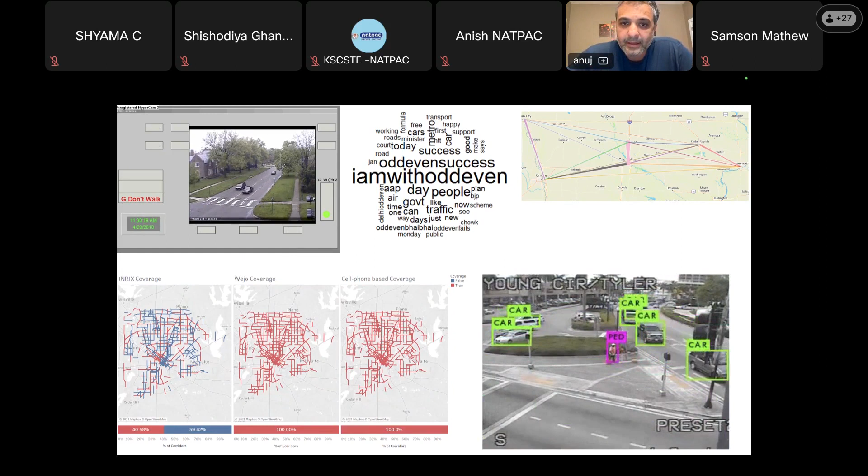The big reason for giving this talk is that as we are moving through times, the amount of data which is becoming available is increasing significantly. We have access to video data coming in. We have access to data in terms of Twitter feeds and cloud-based data available. We also have data coming from telematics of various vehicles driving on our roads. Previously, when we were operating traffic signals, the data usually came from one source, which was probably inductive loop detectors on the roadway. So with all this new data coming into place, there are three basic reasons why this jump in data availability is happening.

One is that the cost of compute is going down significantly. To give you an idea, if you would have bought something which had the power of an iPad in the 1940s or 1950s, it would have cost you millions of dollars. But today you can get it for the price of maybe a few hundred dollars.

The other big thing is that even the cost of sending this data over wire or wirelessly has gone down significantly. As you would know, the cost of communication has dropped. In 1999, if you had to send around 1000 Mbps, you would be paying around $1,200. But today you can almost get it for $10-15.

Which means that people are not only able to process the data on the edge by cheap compute, they're also able to transmit a lot of this data. And what it has enabled is the ability for cars to start communicating and becoming the sensors themselves, because now a lot of these cars are sending back information to their OEMs, which are packaging and selling this information.

The final thing is, once these devices are sending the data back to us, the cost of storing this data has also significantly reduced. If you went out in the market to buy a terabyte hard drive even 10 years back, it was pretty cost prohibitive, but now they are coming for $100. So not only can you process the data on the edge to collect a lot more data, you can transmit it for a very cheap price, but you can also save multiple years of data without spending a fortune.

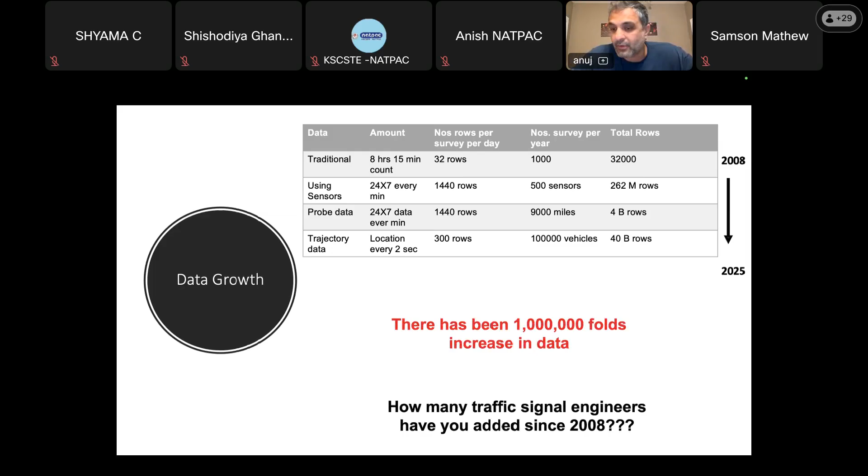So one of the common processes, and this is not just in the US - I have had presentations in multiple countries like Australia, Europe, and even India - they're facing the same problem, that although the data is increasing by a significant amount, the workforce to evaluate the data is limited, and also there is a limited budget, so you cannot just go ahead and put an adaptive system across your corridor.

There has recently been a flurry of tools developed just to provide a dashboard for this performance measure, and it is very easy to dump a lot of performance measures on a dashboard and give it to a department or TMC to look at. But again, we fall back to the same pain point, that the number of people available to evaluate this data is limited, and might not have the expertise or ability to process all the graphs being generated.

So this just gives a comparison of what the state of the art is today and what we are planning to move the industry towards with Signal IQ.

According to some stats in the US, they were claiming that there should be at least one engineer per 100 signals to have it operated at a very optimal and good quality. But usually there is one engineer per 250 to 500 signals. And there is a limited budget to have adaptive systems, so at least in the US, we are not going towards 100% adaptive throughout the city.

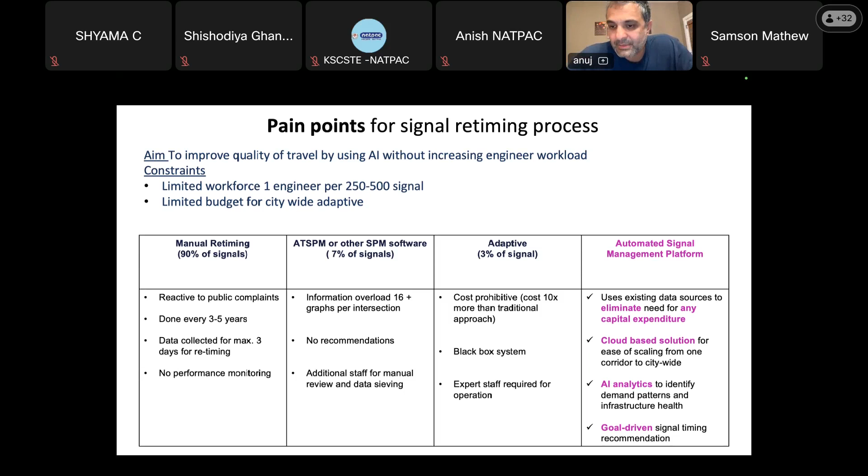We are using AI to analyze the data and coming up with goal-based performance metrics and performance signal timing refinement.

I essentially put this problem in stages where probably we are operating at level 0, where we have some information about the system, but most of the signal timing is done using personnel time, and that is level 0.

As we move towards more dashboarding, what I show is that although the signal performance improves, it requires more personnel to analyze the data from different traffic signals to come up with a good signal timing plan, so you require even more people.

Level 2 is more where we set some static thresholds, so that if a signal is performing worse than a specific threshold—for example, if the level of service falls below D—just pick up that specific signal and let us know and we'll fix it. That is more threshold-based planning.

Here also the personnel time goes down, but not significantly. And finally, we move towards the ML and AI domain for actually reducing this personnel time significantly. And finally, in level 5, we can do a full implementation.

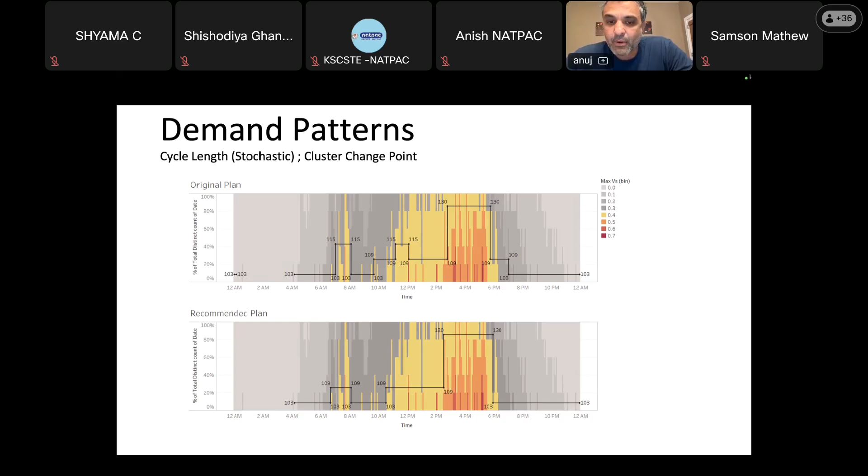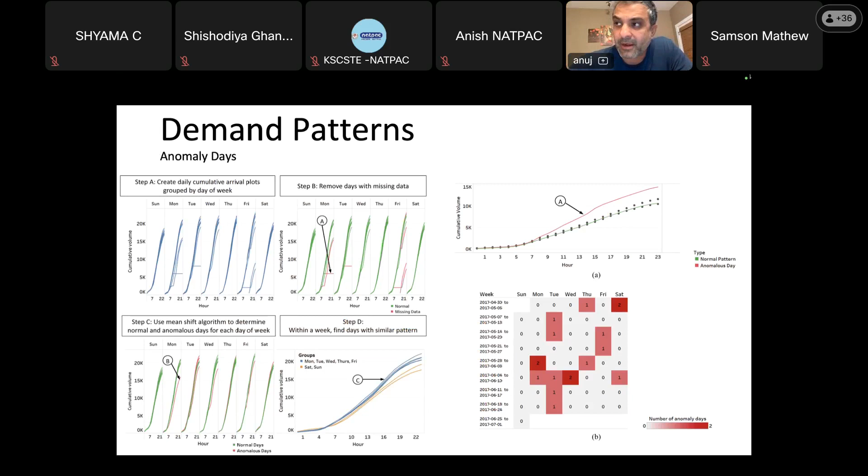So this is the first step after we have removed the event days. And one other thing which we do is look at the event days, how many event days happen for that street, to also assess whether a fully adaptive control would be a better option, or you can have time of day control on that specific site.

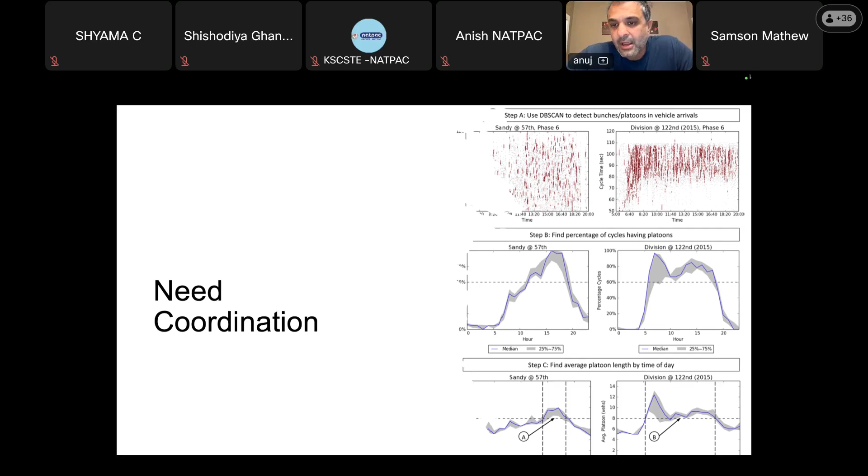Finally, we use something called percentage of cycles in platoon to identify what period of time the coordination is needed. In this scenario, what we are doing is essentially looking at vehicles which are near each other to call them platoons, and then identifying what is the platoon length, how many vehicles are present in the platoon, and then how many cycles during the day have that length of platoon available. So essentially average platoon per time of day and the percentage of the cycle that is having some platoon gives you an idea where the coordination would be important. Otherwise you can run the system free and just minimize delay.

Then after we have found out the cycle length which is relevant, and even the time of day patterns which are relevant, we try to optimize offsets. We used a genetic algorithm to optimize the offset. And this is where we were talking about the optimization function. This specific traffic which we are talking about is not heterogeneous. When I say not heterogeneous, it does involve cars and trucks, but it doesn't involve cyclists and motorbikes that much. This is still in Iowa.

So this is something where we have modified the time space diagram, which is commonly used for signal timing, and we have made it more horizontal by subtracting the time between two intersections. So if you see a green lined up on top of each other, it essentially means that the coordination is going well. Our optimization function is trying to do multiple things in this scenario. It is trying to maximize the green band, but it is also trying to not allow stoppages happening next to each other, a significant number of vehicles stopping. Like if I leave an intersection, I don't want that vehicle to stop at the next intersection.

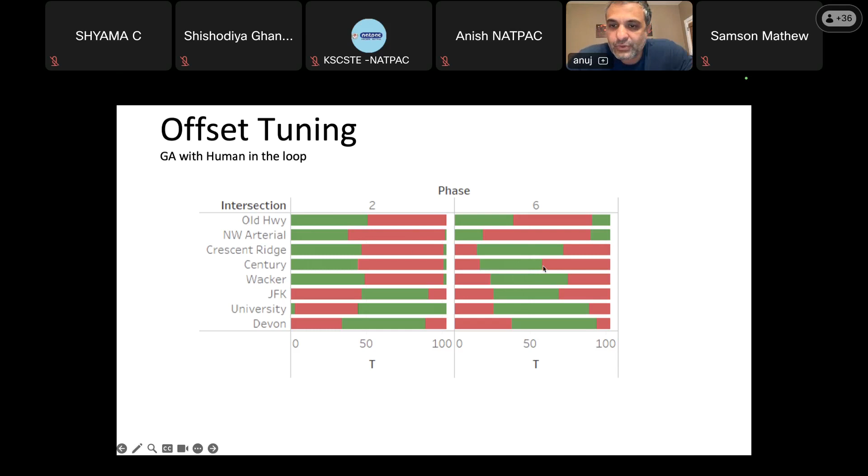So there is not much we can do to control the amount of green time because of the side street demands, but whenever possible we are letting people go through as much as possible, and then allowing the other street to go through. In this case the bandwidth is between the top and the bottom one, but in general that is the idea behind it. So at the end of the day, we produce something similar to this, where we are showing the demand patterns, and then the current timing plan versus the proposed timing plan.

And the color code which you are seeing in the green, in the red, kind of depends on this: it is adaptive. It is adaptive in the sense that the side street only comes on when there is a demand on the side street. So if you are seeing a light coloration in red, that means the number of times we saw that red come up is a little bit lower.

So essentially, instead of having a system which is a black box, every step which you go through and implement can be explained, why a specific value is being used, and this becomes easier for a traffic engineer to understand and implement. So we went ahead and implemented this system in several cities.

Before the fine tuning of the time plan, we wanted to find out which places we should be doing it. We came up with just 4 critical performance measures. Instead of producing 30 or 40 performance measures, we just focused on 4 basic ones. One is split failures, which essentially tells you if the queue is not cleared within 1 green time, that is a split failure. So what percentage of cycles are having split failure is an important measure.

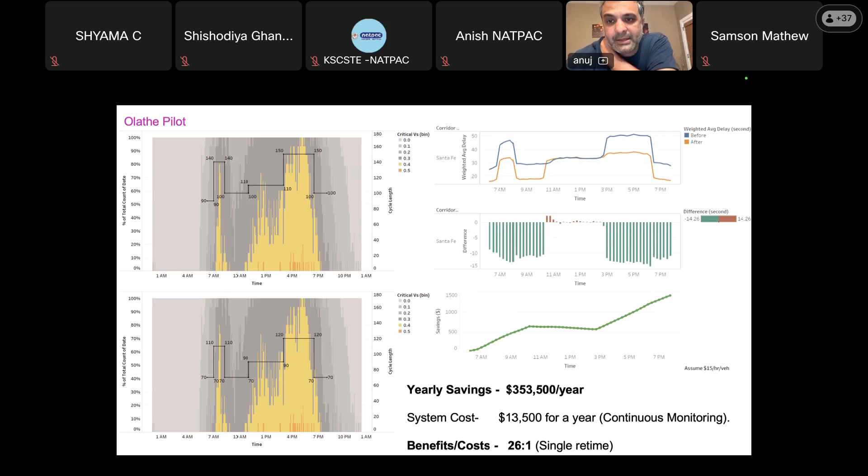And finally, the total savings on this corridor was around 26:1, even when we accounted for the cost of operating this system using cloud computing and getting the data from intersections. So this was pretty significant.

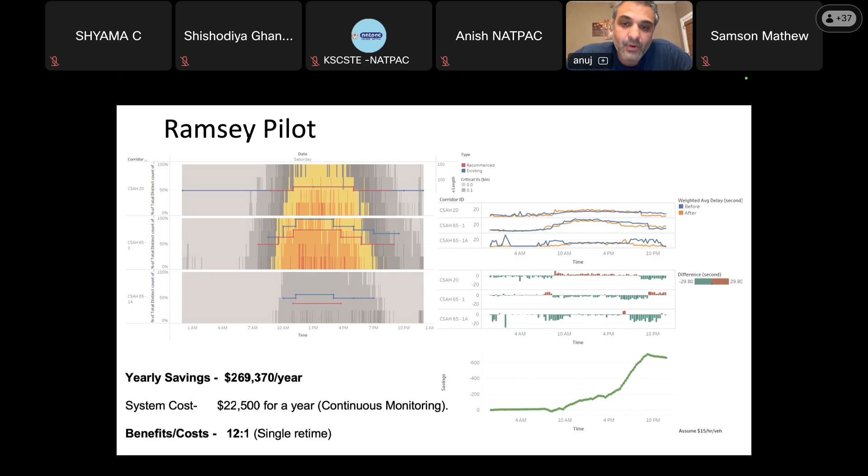Same thing when we implemented in the Ramsey corridor. When you are reducing the amount of cycle which you are providing, there can be negative impacts on your main street delays. And again, that brings you back to the objective function. What is your biggest objective? If your biggest objective is to do best on your main street and not worry about the side street too much, you have to change the weight functions of your GA to do that.

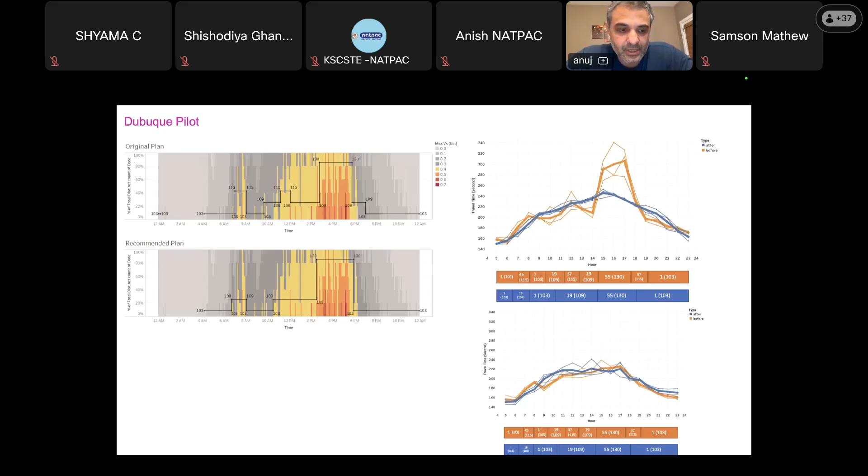So these are some examples where we have implemented the system. In this case, we were able to not only significantly reduce the delays, but also improve the performance on the main street. And this was done using, again, the offset optimization.

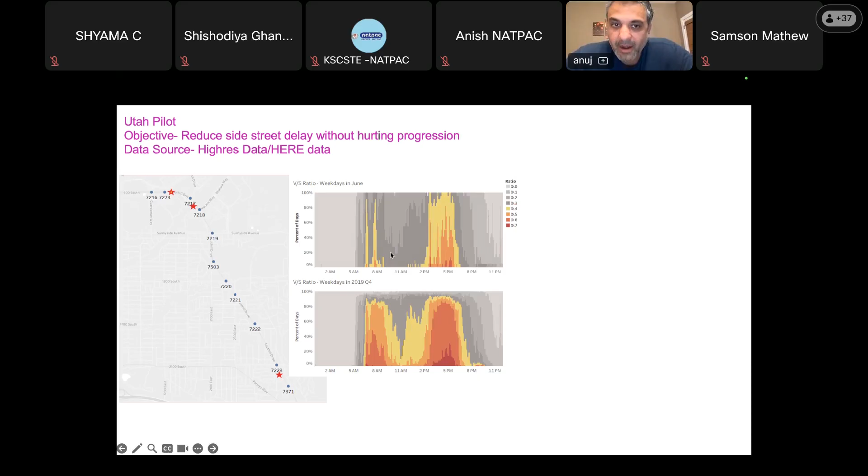So it is not necessary that this has to be done only when there is a little bit of a change. This is a new demand pattern which emerged because of COVID, but this can happen because of several things where the demand pattern completely changes and you have to come up with a completely new timing plan, and that is possible using the system as well.

One thing which we have started including in the system now is, if you have cameras present, we have come up with automatic measures of identifying certain failures and including them in the performance measures. One of the things which we look at is what percentage of time a vehicle is spending within an intersection, and if that time is significantly higher, we start detecting that there might be some kind of a split failure, some kind of a queue spillback happening.

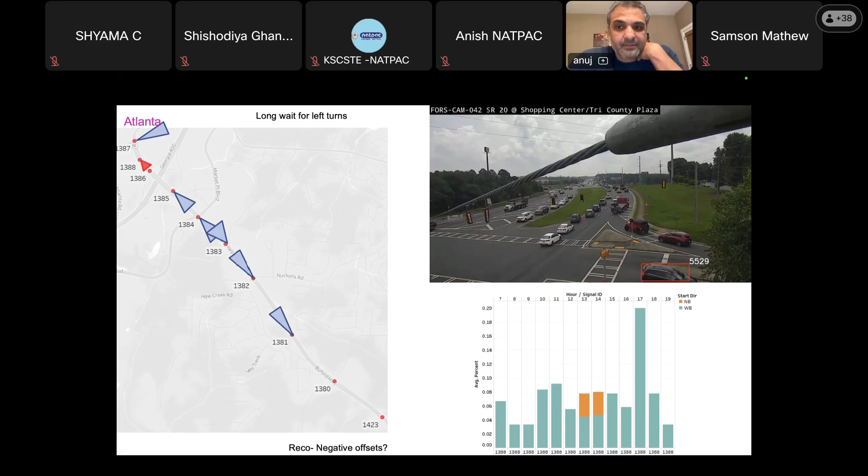So especially in scenarios where you are tending towards oversaturation, such detection gives you a very good framework for identifying issues related with overcongestion in your system. As I said, a lot of systems, when they are just purely doing optimization, might not see all the data and can result in further worsening your system performance.

So using as much data as possible improves your ability to detect such oversaturation and spillback, and this might require a different optimization function where we are managing queues rather than minimizing delays in operating our system.

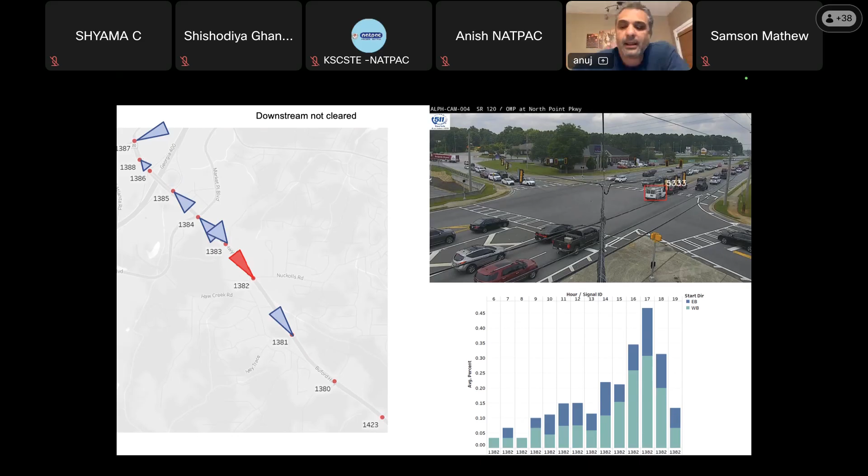One other thing which we haven't implemented yet, but we are moving towards it, is assessing performance using traffic conflicts. So this is more related with safety. So in this scenario, we are looking at the trajectories from the camera which is present over there, and if we see a close call or near miss accident, we keep track of that.

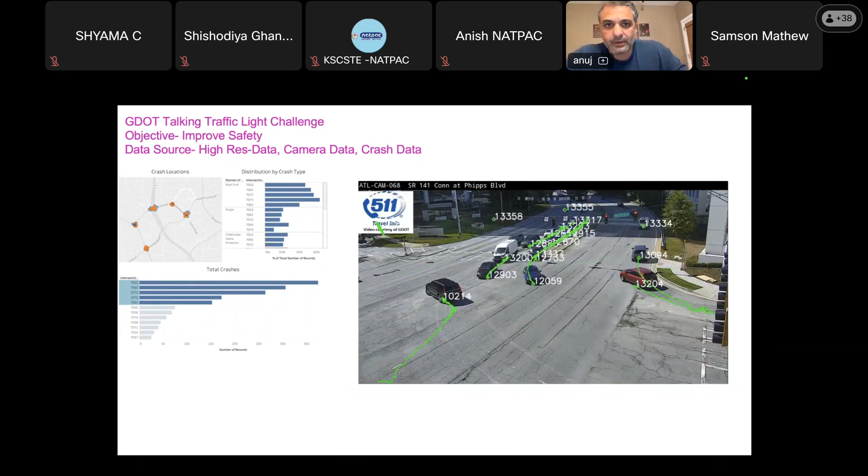Currently, we are developing models to find out what thresholds should be used that trigger any response to a signal timing change or any geometric change. But this is work which is in progress to improve safety at an intersection for improving signal timing.

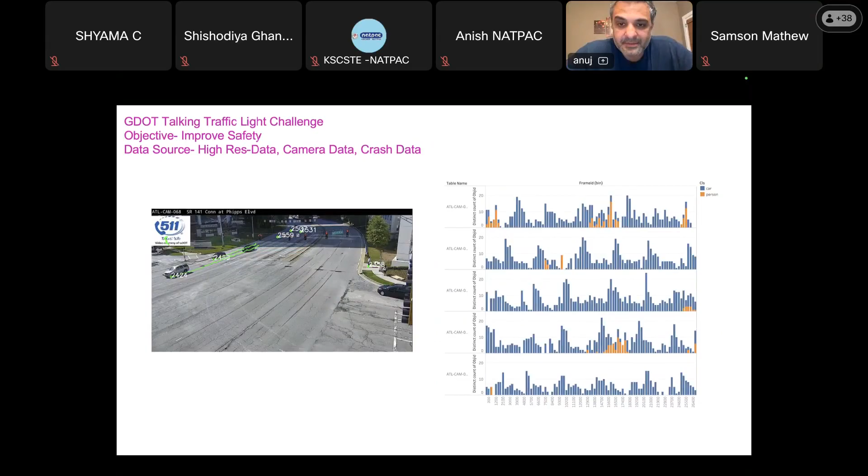I would like to end with just a pitch of why continuous monitoring of near miss crashes can be very relevant at specific signals. This was one of the places where we were working with a state where they had a fatality, and essentially the city was under the impression the fatality is happening because people are running the stop sign

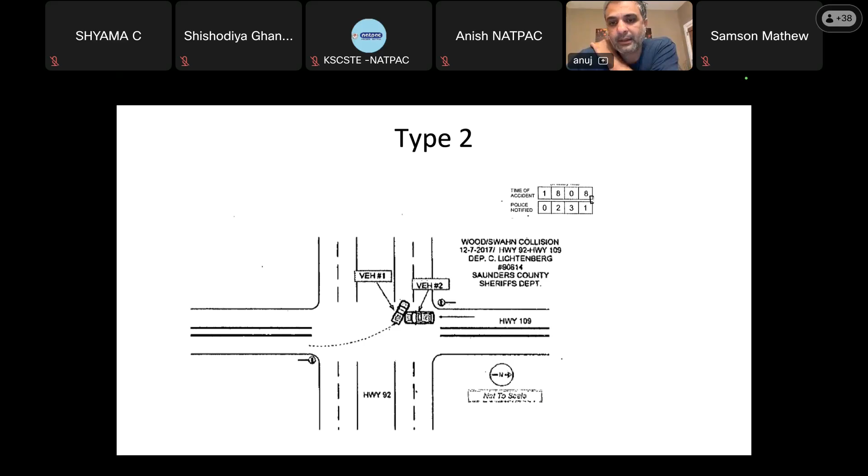without stopping. So in this specific scenario, we deployed cameras to identify what is going on at the intersection. Going into the study, we didn't have any idea why this site is having so many fatal crashes. So the first hypothesis was that there might be a number of people who are not coming to a full stop, and what this system

The pedestrian signal timing depends on different scenarios where we are running the thing. So if there are pedestrian signals which have to be implemented every cycle, in that case we are just increasing the minimum cycle length and implementing it. But in certain scenarios where the pedestrian demand is low, then we are having a push button.

So in that case, again, you have to balance: if you have to do too much transitioning, your coordination goes away. So there is a balance between whether you want to have a bigger cycle length and accommodate pedestrians in every cycle, then you might have to limit your cycle lengths in optimization. Whereas if you don't have that many pedestrians, then you might have to put a push button there and then disrupt your progression at times when a pedestrian is present.

So then the other thing which we looked at was the percent of times where stopped vehicles are not completely coming to a full stop, which was pretty limited. So basically the reasoning that the crashes are happening because of people not stopping when another vehicle is present was not supported by the evidence which we got from this analysis. So we started looking at more videos where we found there was conflict, which means that two vehicles were passing very close to each other.

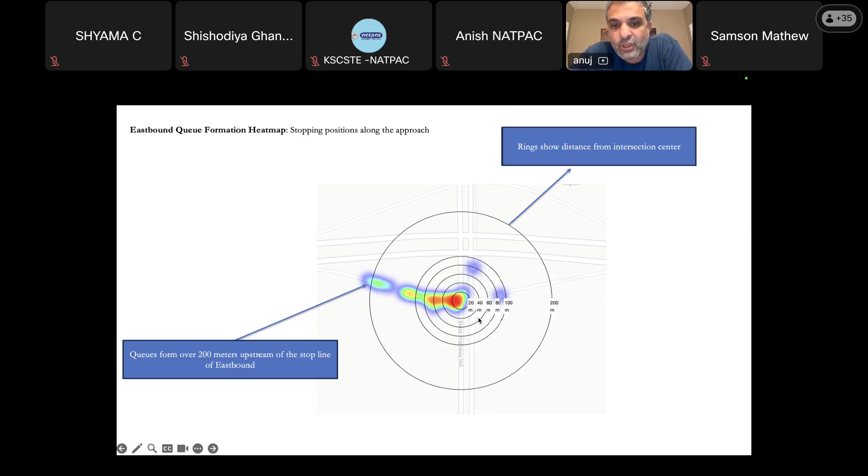There was an interesting analysis when we started implementing the system. The state came to us saying, hey, we are having some problems with ramps, can you come up with a performance measure for motorways when they intersect the signals. So we came up with a new performance measure which measures what percentage of effective queue length is being occupied by the queues being generated. Essentially, we project for every hour how the queue is extending, and find out whether it is exceeding the queue boundary, the amount of space available.

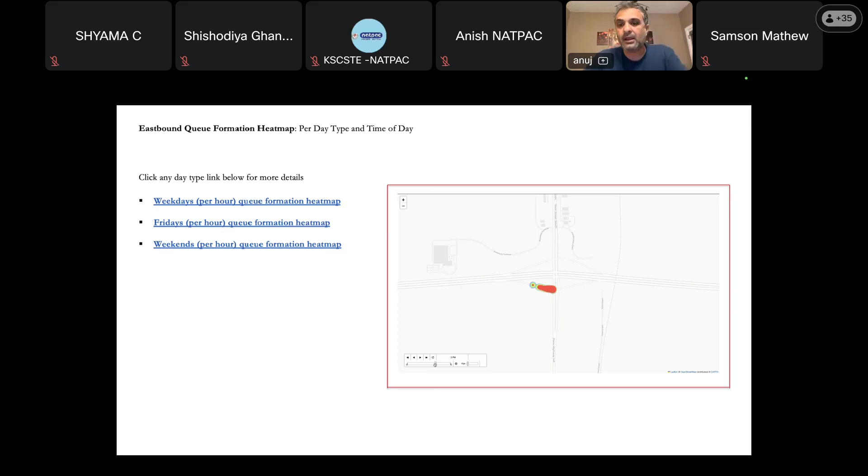And again, as I said, different optimization functions are required, and if you are going towards a direction where you don't have queue space left, then you might have to assign more green or reduce the cycle length. So this enables you to identify the problem and then design the solution rather than one solution fits all. So this was an interesting project which we have been working on.

To wrap up the discussion and open up the conversation, I just want to make sure that for any agency trying to set up a system, and any system proposed to you, one of the questions you should be asking is: is it able to use all the data which is available? Do you have to buy more hardware? If you have to buy more hardware, is it justified depending on what you can do with the system?